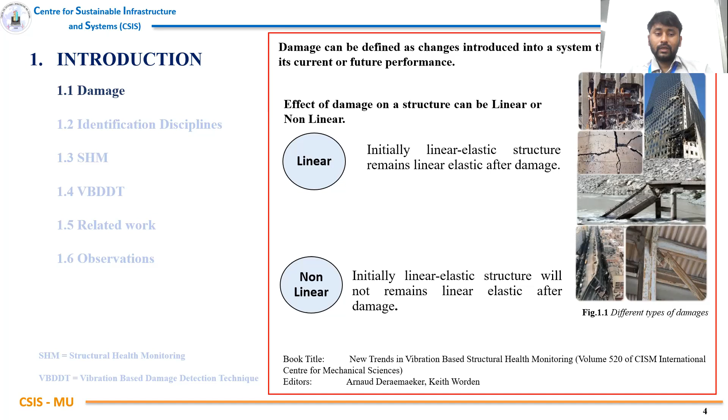These are the damage identification disciplines, or structural health monitoring disciplines: structural health monitoring, condition monitoring, non-destructive evaluation, statistical process control, and damage prognosis. Due to the continuous monitoring of the structure, SHM has become very popular in this discipline.

Now I'm giving the basic idea about what is meant by SHM. Whenever we are having any health issue, we'll consult a doctor. He will examine you with the help of medical equipment and he will prescribe the medicine if it is required. In the same way, a structural health monitoring engineer will also examine the structure with the help of sensors and recommend whatever is necessary to prevent the damage or strengthen the structure.

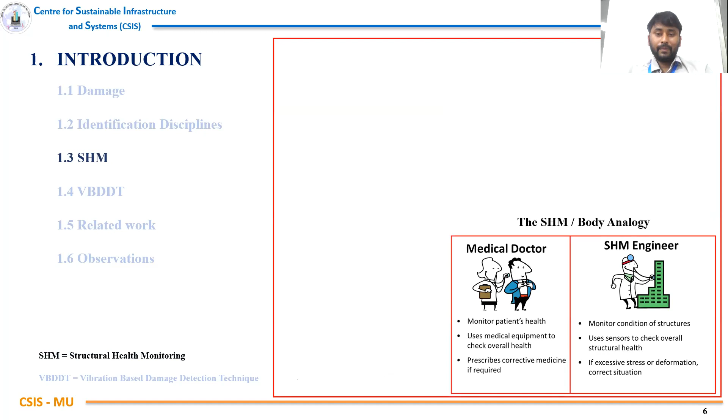According to the literature, the various classifications of SHM activities are as follows: detection, localization, assessment, prognosis, and recommendation. Detection means whether the structure is having damage or not. After that, if damage is present in the system, where is the damage? That is called localization.

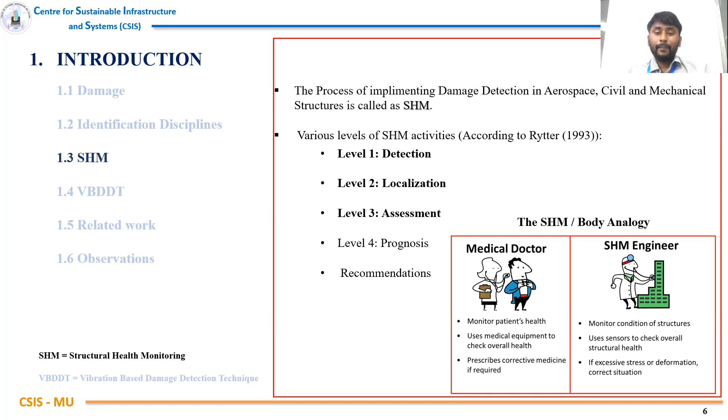Assessment means what is the severity of the damage. Prognosis means whether it is increasing or decreasing. And after that, we give recommendations to strengthen that structure.

There are various methods in literature to identify the damage: local and global methods. These methods have their own advantages and disadvantages. Coming to vibration-based damage detection, these methods come under global methods.

This is important because whenever there are any changes in the system, that will be identified by modal properties, which is called vibration properties. That's why vibration-based damage detection is becoming very popular in this SHM field.

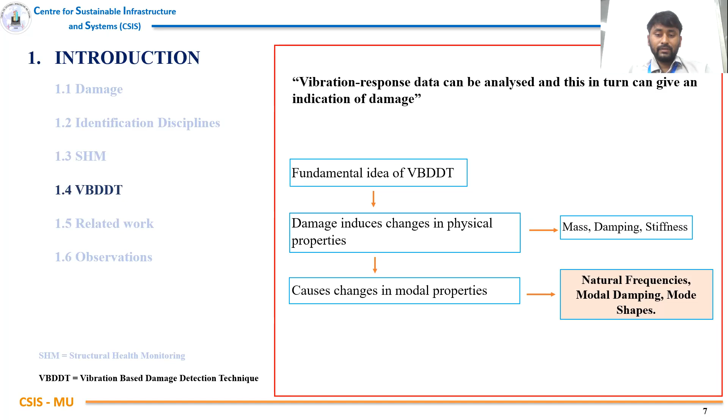In our study, we are considering the natural frequencies as an input.

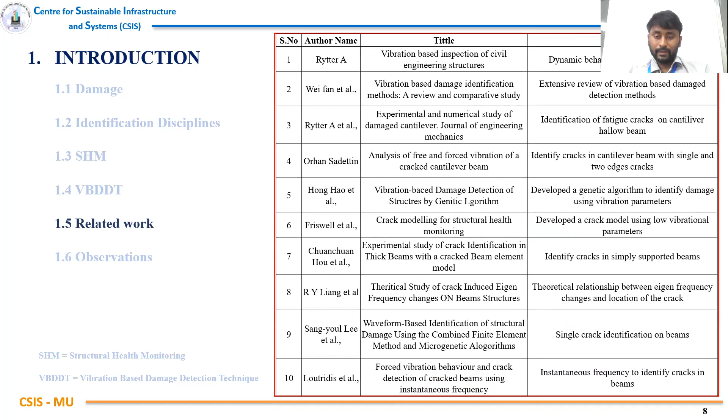Multiple authors are trying to address the same problem and identify the damage with the help of vibration parameters, of which a few research papers are highlighted here. Coming to the observation, if there are any changes in the system, that will be identified through these modal properties.

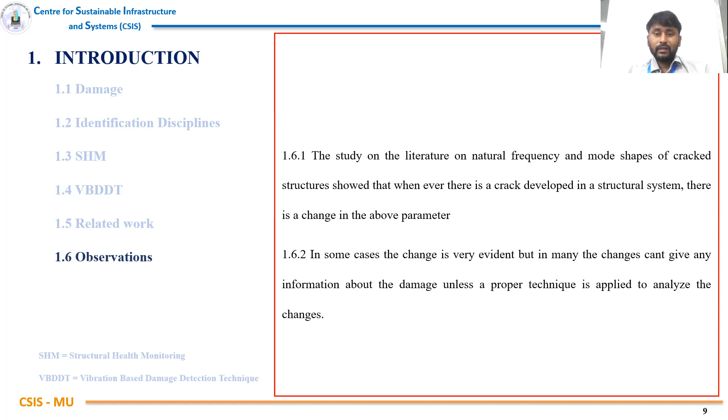For minor changes, we need a system to identify that. For that, we are using fuzzy logic. Why are we using fuzzy logic? Because whenever there is any change in the system, that will reduce the stiffness of the structure. Sometimes this reduction in stiffness will lead to the sudden collapse of the structure, and because of this sudden collapse, there is a possibility of loss of human lives as well as infrastructure loss.

So in order to resist this collapse, we need a system to identify the damage at the earliest stage and also quantify the damage. So we need a system that can also behave like a human being.

From a literature study, we understood that fuzzy logic is a tool that can identify the damage and also quantify it. These are some literature reviews: multiple authors were trying to address the same thing, finding the damages and quantifying them with the help of vibration parameters by using fuzzy logic.

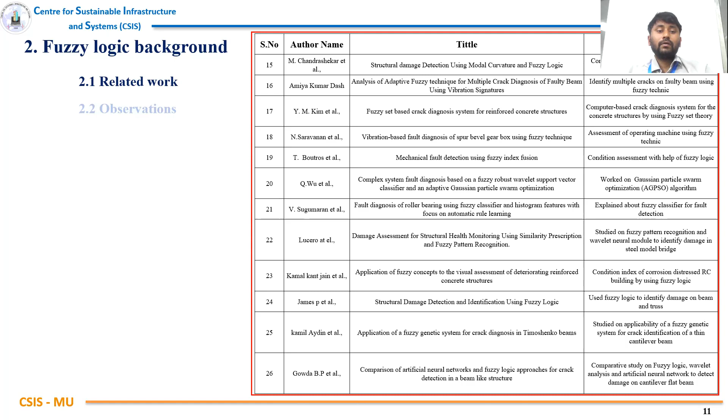Coming to the observations, fuzzy logic has been limited to single and double cracks only, not multiple cracks. Also, the capability of artificial intelligence methods such as fuzzy inference systems has not been completely explored to design and develop a crack detection algorithm.

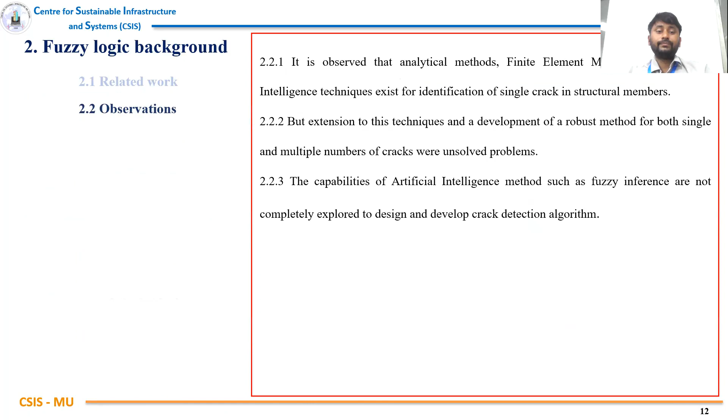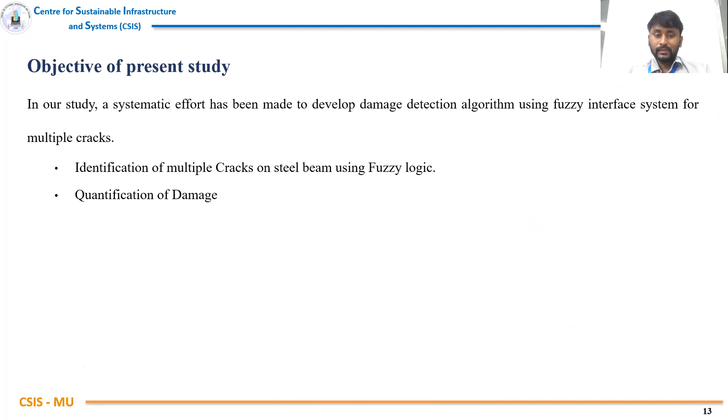Coming to the objective of the present study: we are trying to identify multiple cracks by using fuzzy logic and also quantifying the damage.

Coming to the methodology, there are two methods to analyze the structure: one is the forward method, another is the inverse method. In the forward method, we are trying to calculate the modal properties when the structure is having the damage.

Coming to the inverse method, we are identifying the damage with the help of these frequencies. So in our methodology, we are using the inverse method.

Coming to the fuzzy interfaces, there are a few methods to train the data: triangular method, trapezoidal method, and Gaussian method. When we compare Gaussian membership with these two membership functions, the Gaussian membership function is giving better results compared to the others.

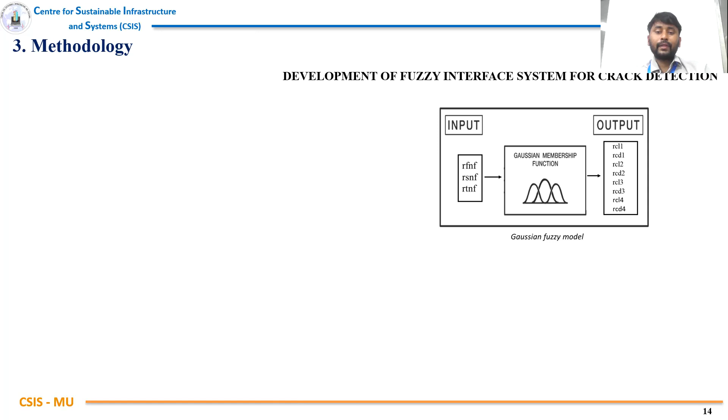Also here we are giving 3 inputs and 6 outputs. Those are first, second, and third natural frequencies. Output is related to crack location and crack depth. These are the notations for that: RFNF, RSNF, and RTNF.

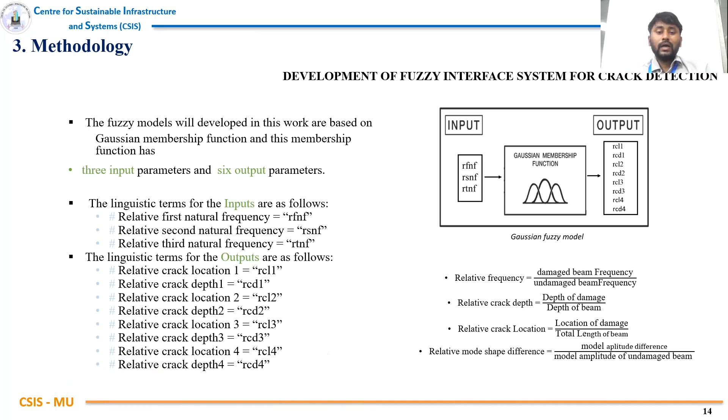So we are calculating relative frequencies to reduce the biases between data.

Coming to the analysis and results, we need frequencies to give as input. For that, we are taking the help of the numerical method and calculating the natural frequencies for all possible cases. In our study, we are using the ANSYS software to extract the natural frequencies.

For the robust performance of the model to identify damages, we need to correct data. For that, we are comparing our numerical results with the analytical results present in our reference paper 14.

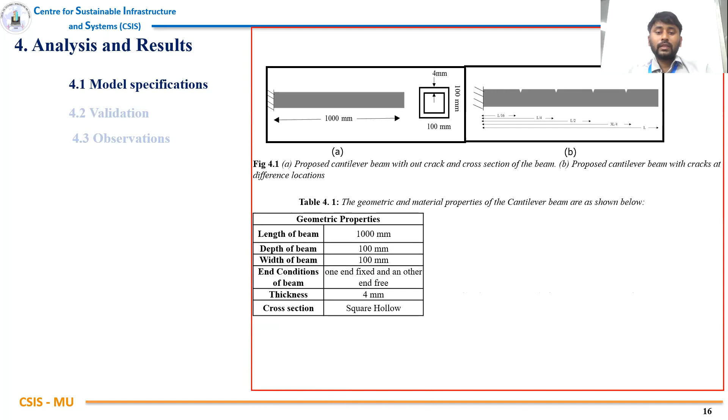For model specification, we consider a cantilevered beam with a length of 1 meter and cross section of 100 mm by 100 mm, thickness of 4 mm. The possibility of damages are considered at various locations and depths also. These are the geometrical properties, material properties, and possibilities of damages.

For the validation, we compared our results with the analytical results present in our reference paper. In the reference paper, the author tried to identify damages with the help of modal properties. For his study, he considered 6 damage scenarios from single crack to multiple cracks, which we can see in the slide.

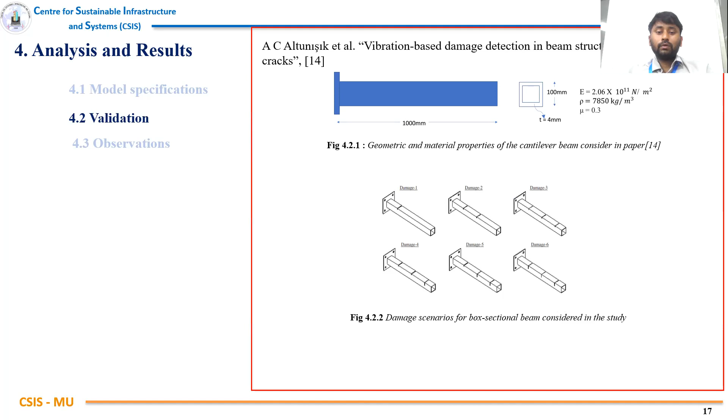These modal properties depend upon the mesh size as well as shape of the damage and geometry of the damage. Geometry is nothing but depth of the damage and width of the damage.

Coming to table 4.2.1, when we compare our mesh sizes with other mesh sizes, we observe that the coarse mesh is giving better results when we compare the natural frequencies with the analytical results. This coarse mesh is giving lesser difference compared to other mesh sizes.

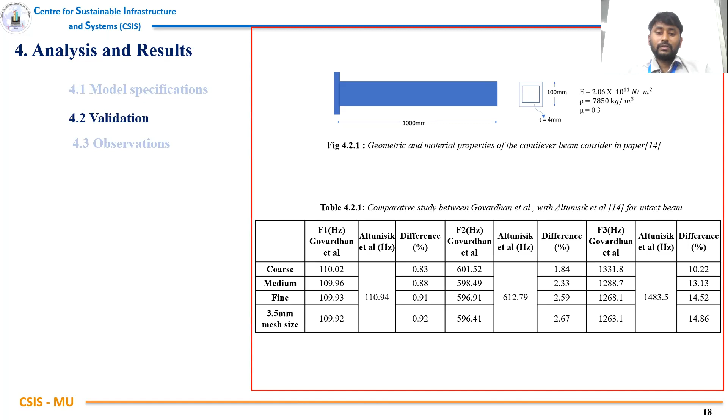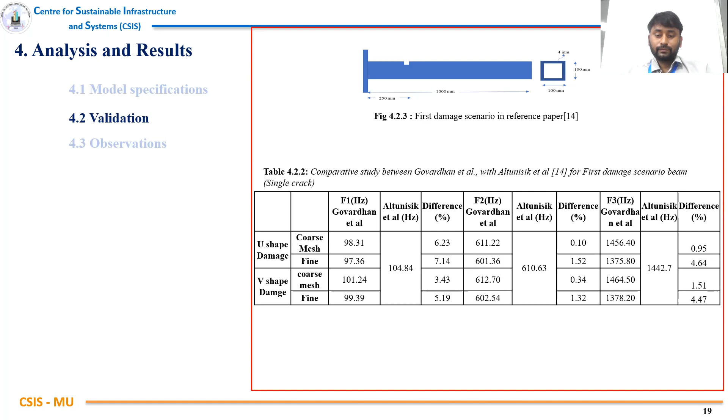Coming to multiple damages, when we compare our damage shape with the analytical results, it has been observed that the V-shaped crack is giving better results compared to the U-shaped crack.

Coming to the width of the crack, the author considered 15 mm crack width in reference 14, and in our study we considered crack width of 1 mm. We are comparing the 15 mm crack width and 1 mm crack width for damage scenario 1 and damage scenario 6. Whenever comparing these scenarios, the same percentage of reduction has been observed in the 15 mm and 1 mm crack width.

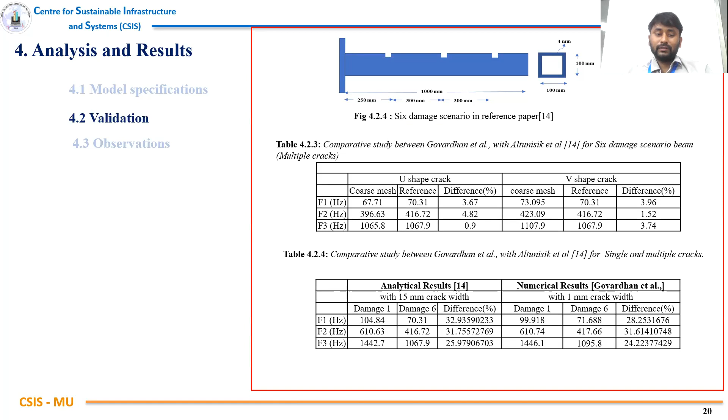Coming to the observations: as explained in 4.2.1, it has been observed that coarse mesh is giving considerable results compared to other meshing types. Coming to the shape of the crack, the V shape is giving better results than the U shape. Coming to 4.2.4, it has been observed that almost the same percentage of reduction in frequencies has been observed when the crack width is 15 mm and 1 mm. From this, I would like to conclude that whatever numerical procedure we followed in the study is correct.

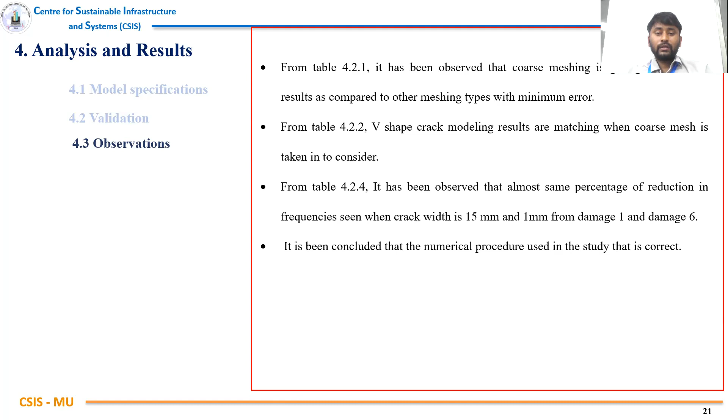Coming to the conclusion: damage analysis and identification is very, very important. If there is damage, even very minute, we have to find that. For that, we need a system to identify those minute changes also.

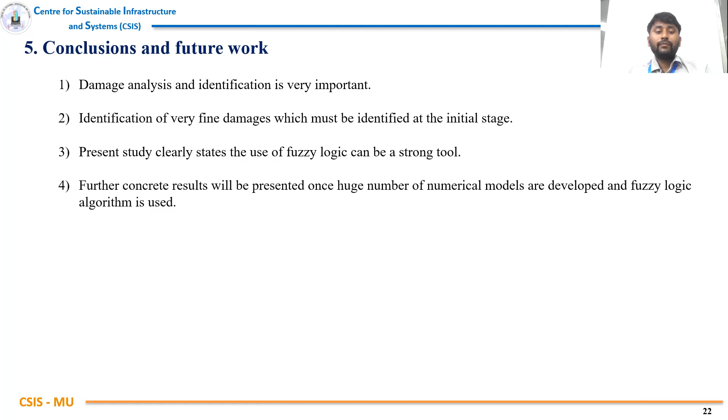The present study clearly states that use of fuzzy logic can be a strong tool. In future work, further concrete results will be presented once a huge number of numerical models are developed and the fuzzy logic algorithm is used to identify the damage location and quantification of damage.